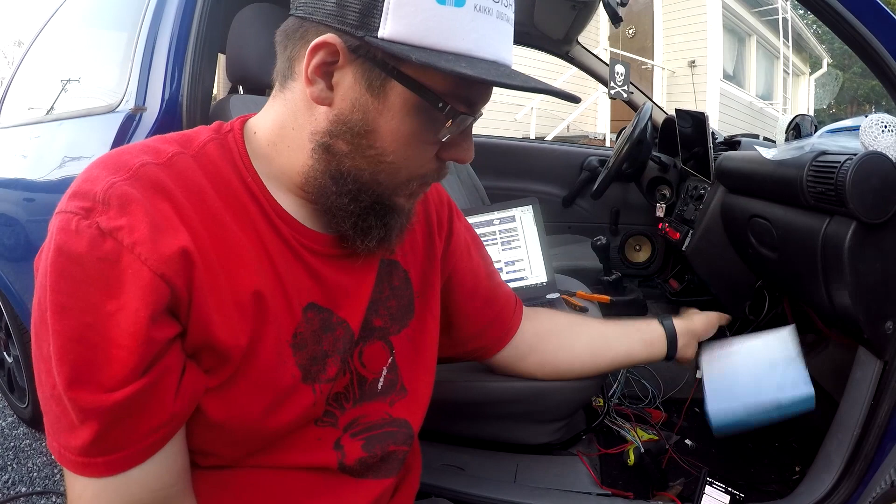Hello YouTube, I have here today a Teltonika FMB120 tracking device. Small unboxing, it only has the device and a small micro USB cable, but with this device you can do actually pretty much amazing things. So first of all, we are installing it here now on this Opel Corsa, and then we'll be checking out how to configure it and everything else.

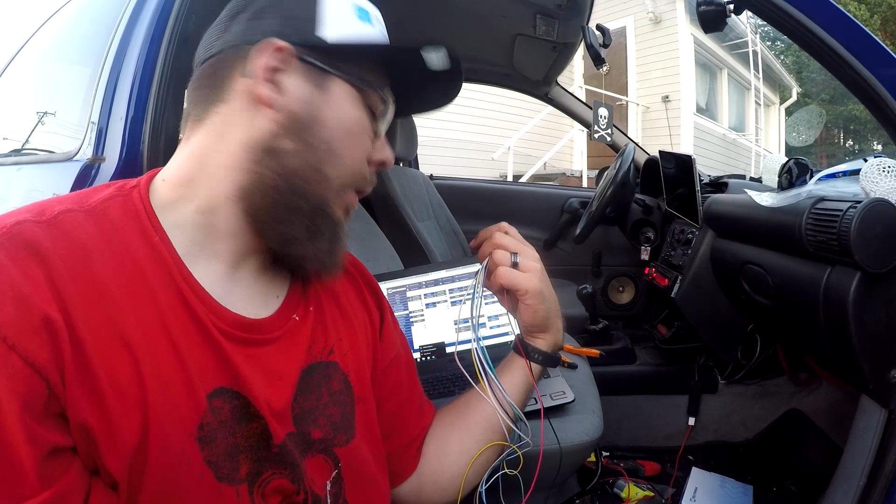But for now we just need a plus and a minus to connect this. Keep in mind that this actually can control some of your car features like relays and stuff, so you can put the ACC off or fuel pump off with just calling into the device. But it needs external relays, so we will not be using it now.

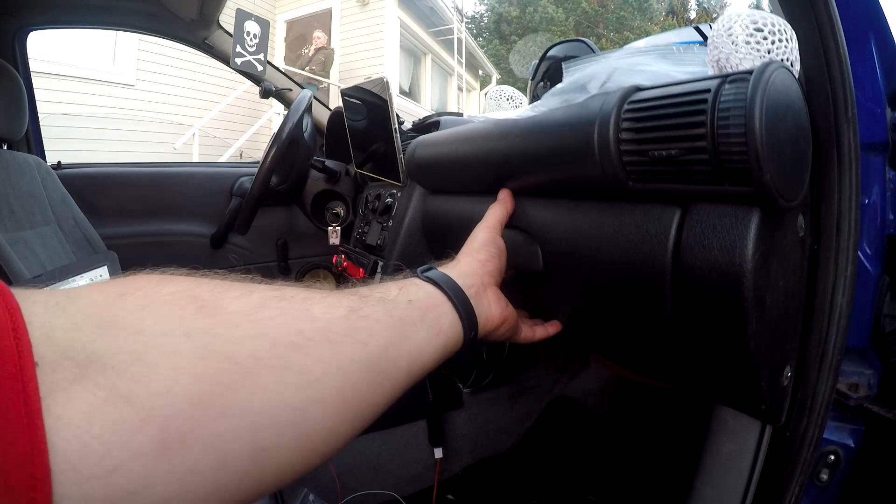But let's just install it first. So we need plus and minus, and we are keeping in mind that we want it to have the relay possibility sometime in the future. So in this Opel Corsa we just need to take this off here and check it out behind here, and we can find a batch of relays, and I can just take them off like so.

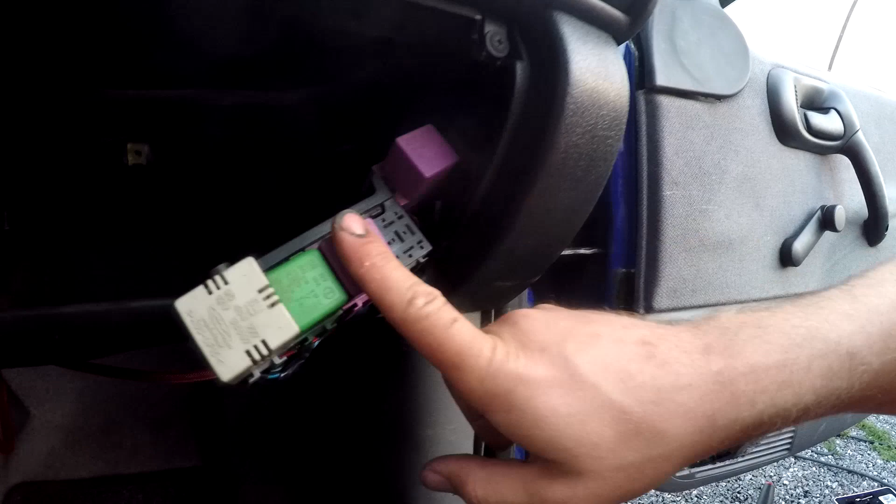We have a fuel pump relay in the engine bay, a fuel pump in the fuel compartment of the tank, and this is actually a relay that stops the car driving if you don't have the correct key, and some audio device here if you leave your lights on when you shut down the car.

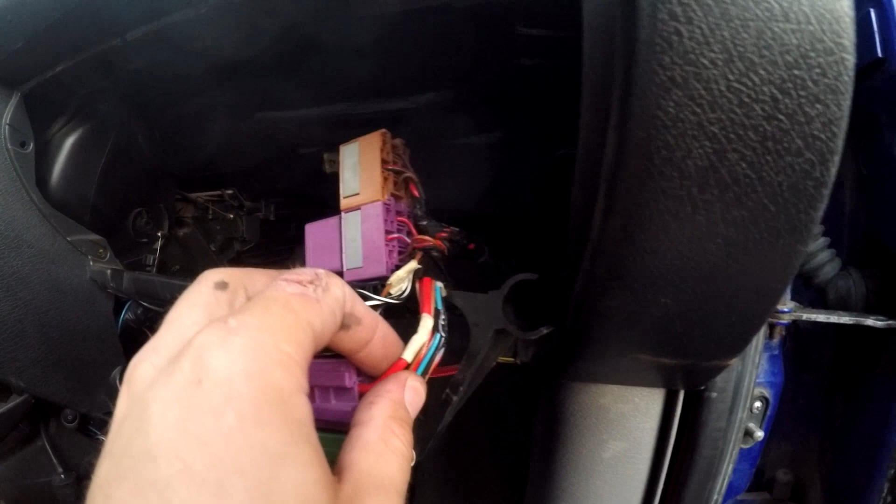And underneath here I have already turned this out. I have already checked out what kind of wires I will be needing. So we will be needing a constant feed of 12 volts, which is located here, and a constant ground, which is located here. So we will just be connecting this Teltonika into these two wires.

So everything now is set and done. Actually it was quite easy. I suggest you just strip the wire, not cut the original wiring. Strip the wire and solder it on like so, minus to minus, plus to plus, to have it working.

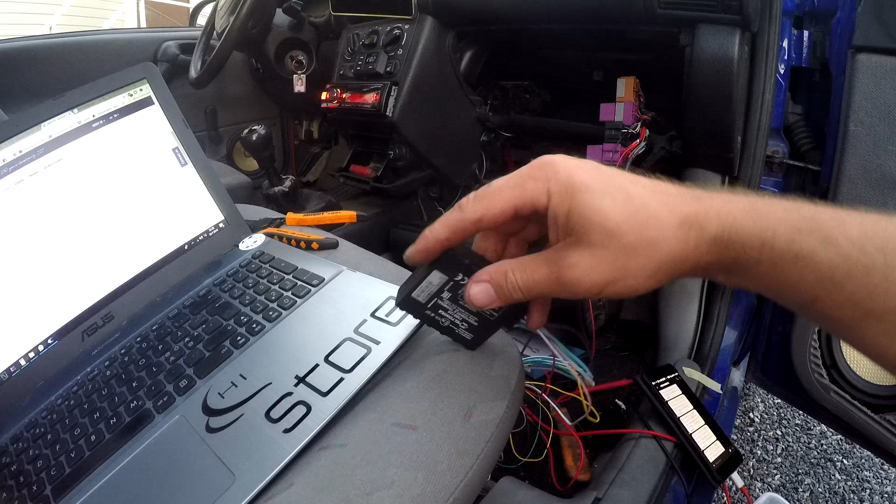Now we will be opening this box and connecting it with the computer, so we can check out what kind of features it has. So in the link in the description we'll be going to Teltonika's own webpage, and here you need to install PC drivers and get the configuration, and it looks like this.

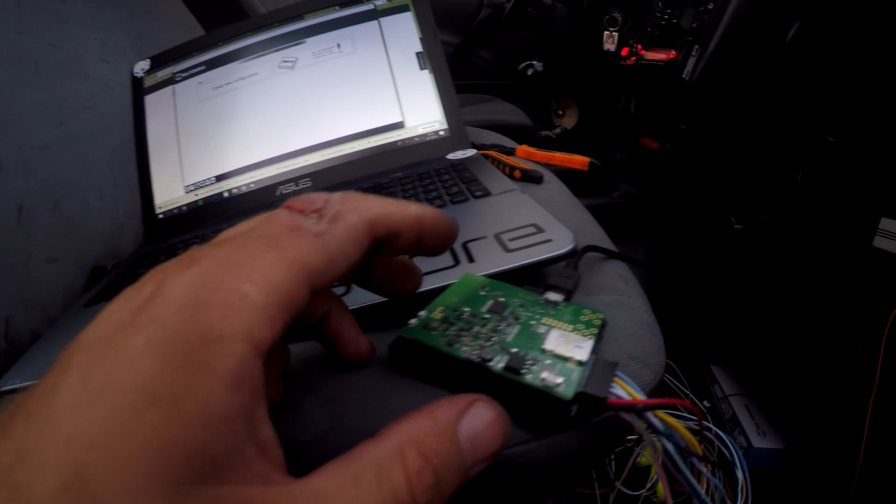So it is now connected with COM port 4, and we have here a SIM card, not the nano but the small one, and then we have the micro USB in. Now we will be connecting into the device like so, and let's find out.

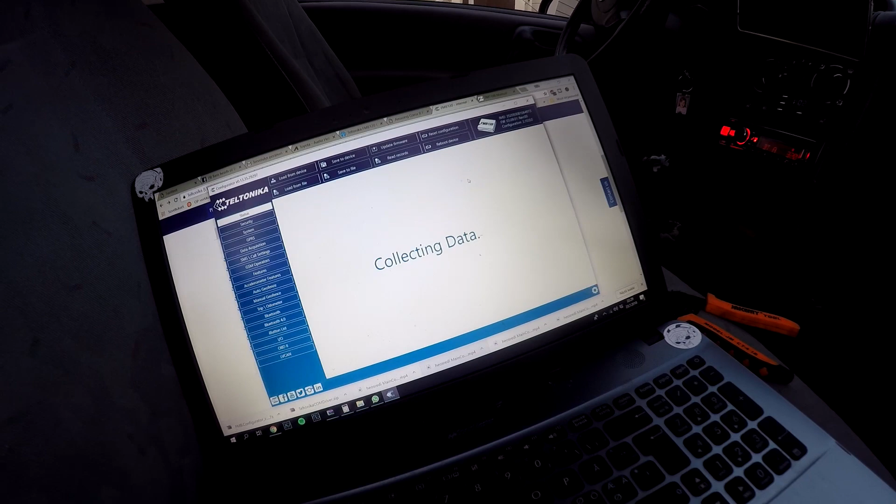So first of all, inside here we can see that it is already connected into GNSS. That is a satellite, and we have a longitude and latitude of where we are, what kind of speed we are going, etc. Now first of all we need to go into SMS and call settings.

No, not that. We need to go into security settings and set our PIN number. So we have a prepaid SIM card inside there, and we need to put the PIN here so we can connect into GSM. Now after that we'll find out here that we need to have time synchronization corrected, so

it syncs with the server outside. We will be explaining the server side, where we can check out where the car is going. Then we need to set here in GPRS our domain, which is GPSWOX I think it was, EU server with a port here, so we can connect this device into a web server, broadcasting this stuff to the web server so we can check it out later on.

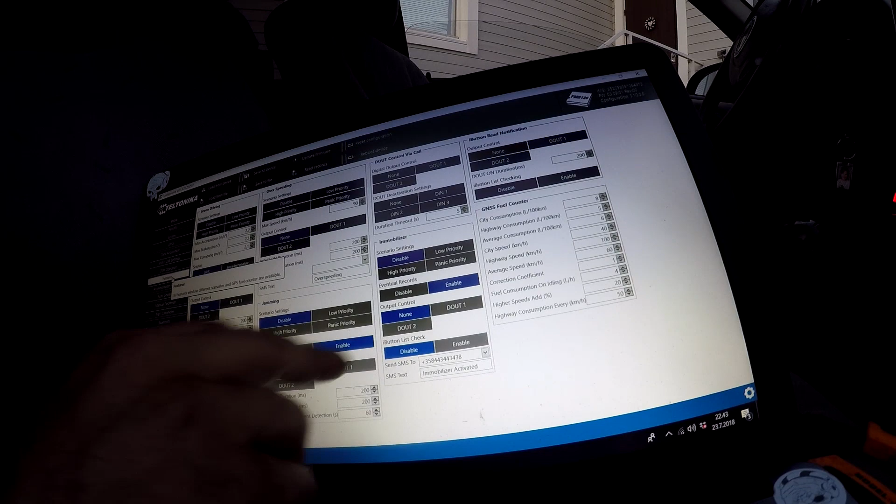Now in the feature zones, here we have digital out control. This is being used if you want to cut down the fuel pump or set up something inside the car on or off. So with this you need to have deactivation settings. You need to use a completely yellow wire, this one, to take it out.

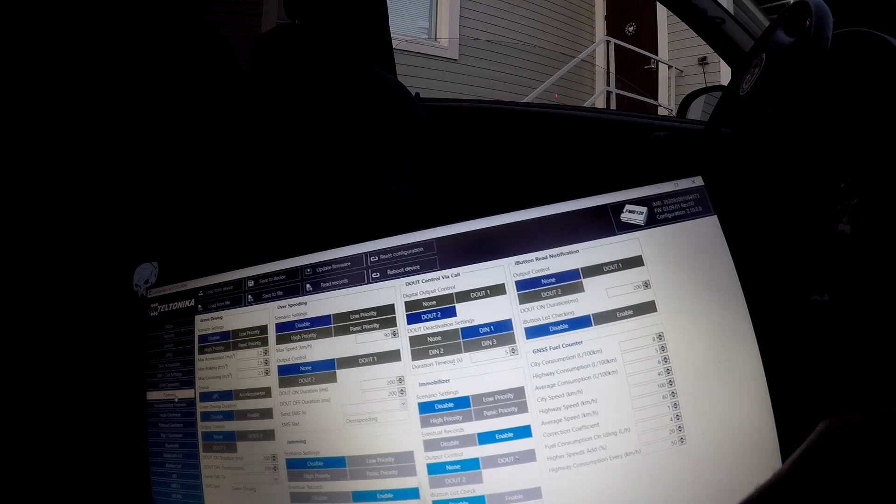This is DIN 1. So to press, for example, put this into 12 volts, everything works. When you call, it cuts out the fuel pump. Really easy to use. You can set your fuel counter and everything in here, so it will explain how fast you are going, what kind of fuel consumption you have, etc.

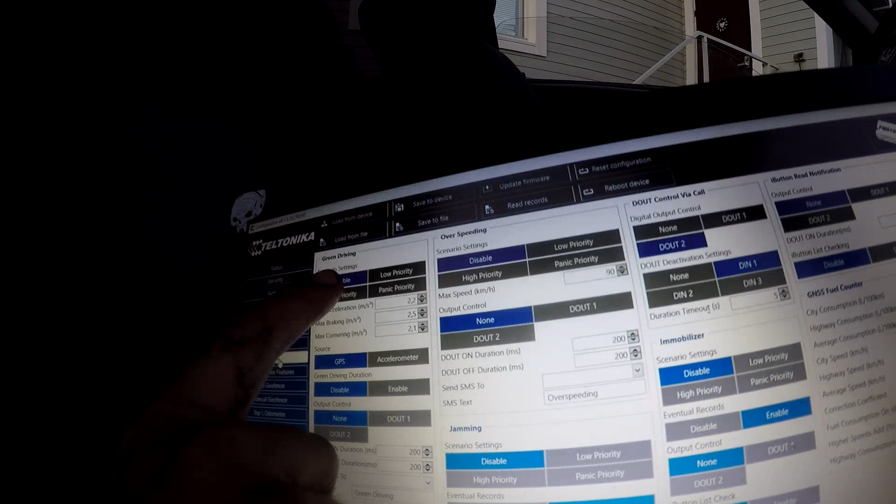And in here, green driving. This is actually quite nice. If you install this, for example, in your son's or your daughter's microcar, it has max acceleration, braking and cornering settings.

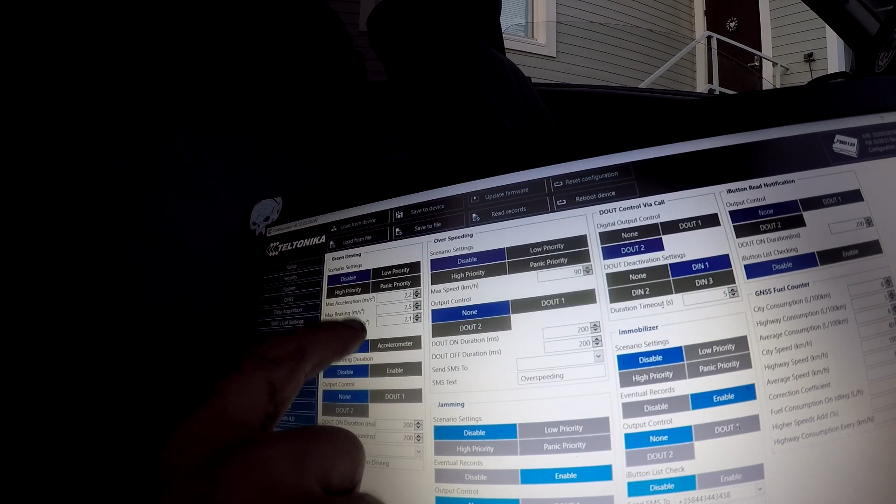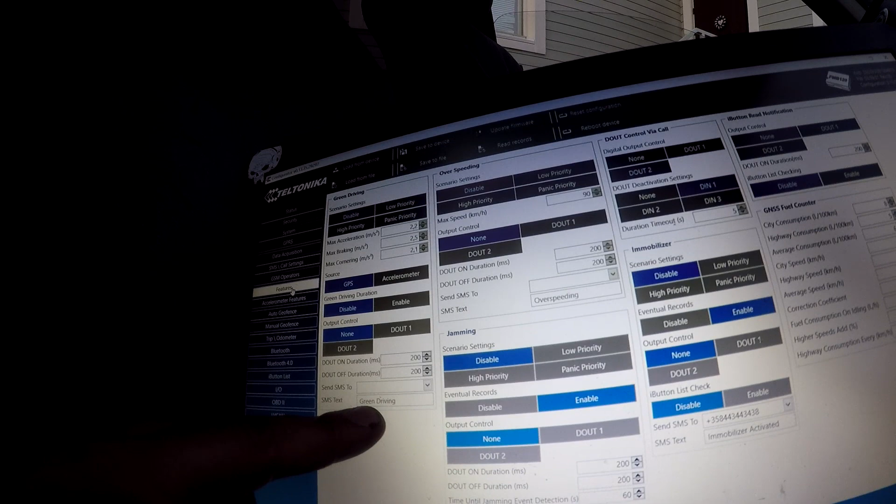If the microcar or the car is going too fast, too slow, or taking really tight corners, it actually can send you an SMS that your youngling is going too fast, so you can send them a text or call them to stop speeding. Actually here you have an over speeding limit.

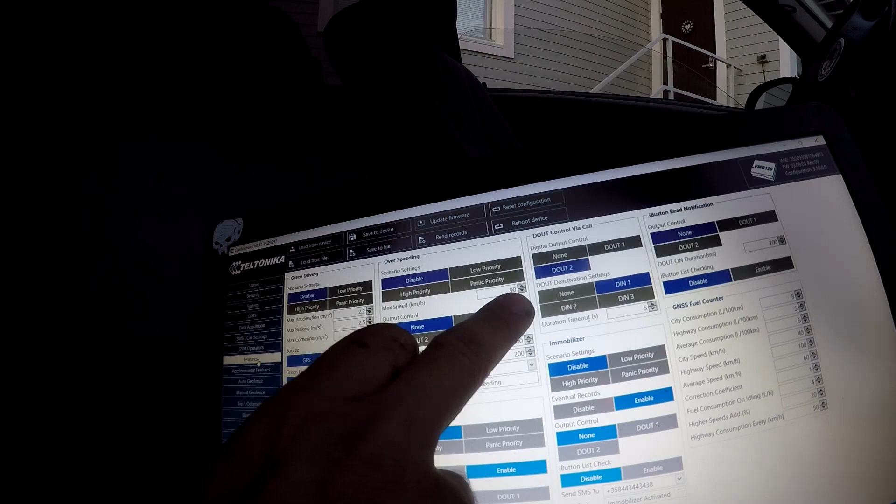If you have a microcar that can go only 45 kilometers per hour, you need to set this to 45 kilometers, set it to high priority, and send a text to your phone, so you will see if the microcar, if your youngling, is going too fast. Many features in here.

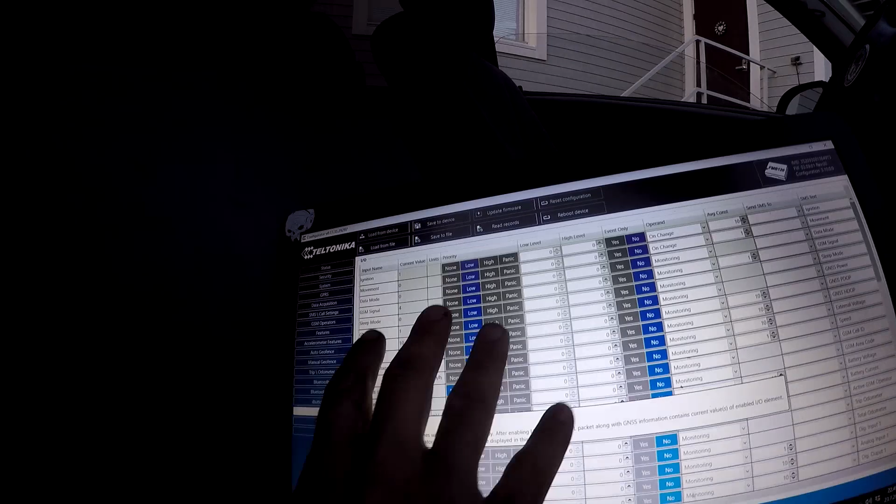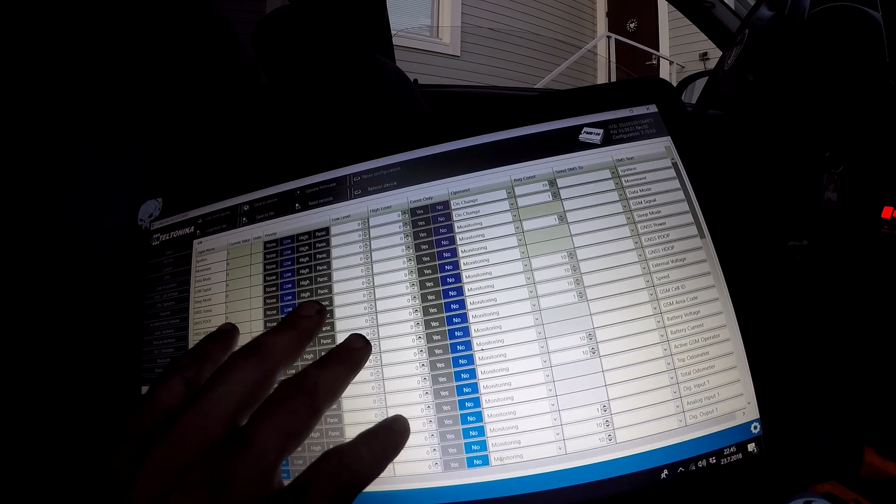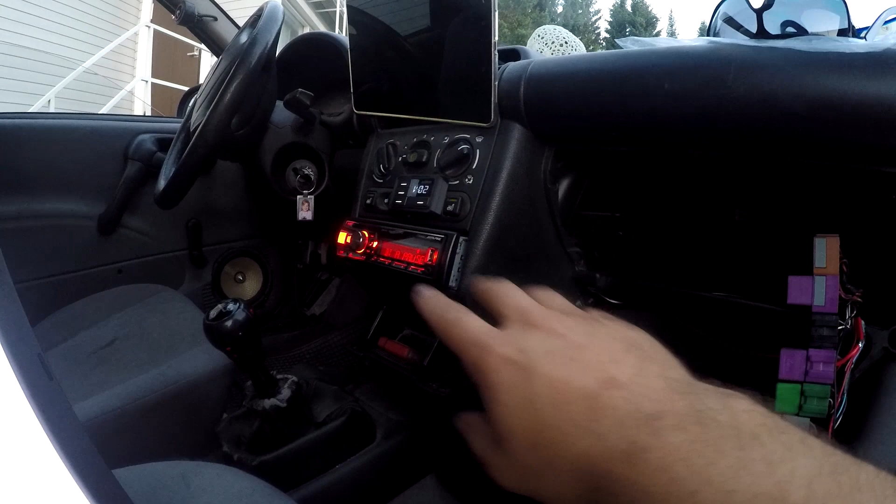It also has internal and outside I/O ports. You can set every I/O port to do what you want or send messages. For example, if you have this connected into OBD, if the fuel consumption is too high, it can send you a message, or you can connect it with Bluetooth. I think this can actually be connected with a head unit, so every time you call it, it will connect to the head unit and play your sound from the stereo. Really much stuff here.

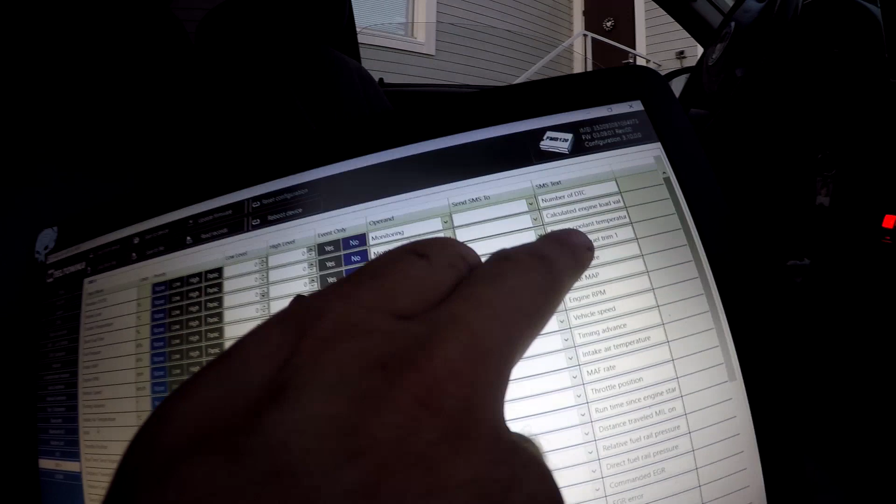You can access all the OBD stuff in here. You can monitor it, or set it to send a text message if something changes too high or too low. As an example, if the coolant temperature goes too high, it will panic and send a message, or perhaps change some values or put something on or off.

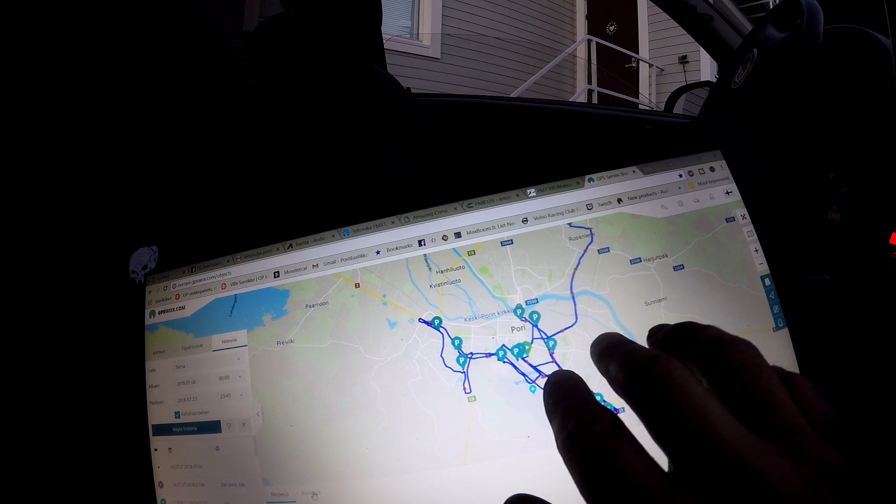Now when you have set these GPRS settings with the server settings here, you have a website called europe.gpswox.com. Here you can see where my car has been driving, where I've been parking a lot, what way, and how long it takes, how long I was in there. It will make trackings. You can check history, like now or all the days I've been driving. It's really easy to use.

As an example, if you own a taxi company, or a service company that cleans roads or plows snow or something like this, you can set this into that kind of device, and it will track where the car has been, and you can say, hey, we have been here, it has been sanded down, or the snow has been plowed.

You need just a prepaid or some really cheap SIM card, plus and minus, and that's it. 69 euros. It's a bit costly compared to the Chinese ones, the really cheap trackers, but I've tested like 3 or 4 of those and they all have some kind of difficulties to set up. This one was just really easy. Plug it in, put the computer in, everything you can find is in English, everything just works.

Tracking started immediately when I put the server on and made my details there and logged in. Only thing is it can only track one car at a time. If you want to track two or more cars, you need to pay a monthly fee. There are really many different kinds of websites where you can track these devices if you have more than one car.

Now, what do I like about these? You can actually install these inside an amplifier. It is so small and only needs plus and minus. You can cut the rest off and put it inside the amplifier, and when somebody steals your amplifier, you can see where it is going and take it back. Really nice small feature. I actually had a 2000 Digital Designs M4A stolen from me, and I really wish I would have had this kind of device inside it.